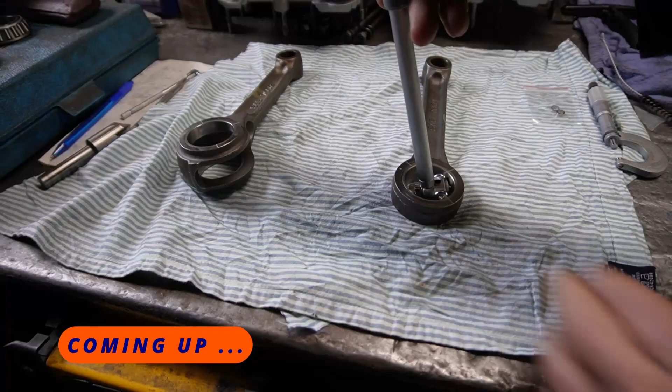Today we're going to move ahead with Gus's motor, and I got some parts in and I'm really stoked. I ordered myself a new set of small bore gauges, which are very hard to get for small holes. I have them for my cylinders and such and to measure, but to get down to something that's like 1 5/8 inches and stuff, it's hard to find something. But I did, thank God for the interweb, and I've got a little something to use.

I've been able to check these out. I had a little problem with my telescoping gauges, these little ones like this, and I was getting contradicting readings back and forth and back and forth. I wasn't sure what was happening, and it was getting very frustrating. So I took a little trip and went up to see my buddy Jimmy at Scotia Machine, and we talked about what was going on, and I said, Jimmy, here, measure these things for me and see where I'm at.

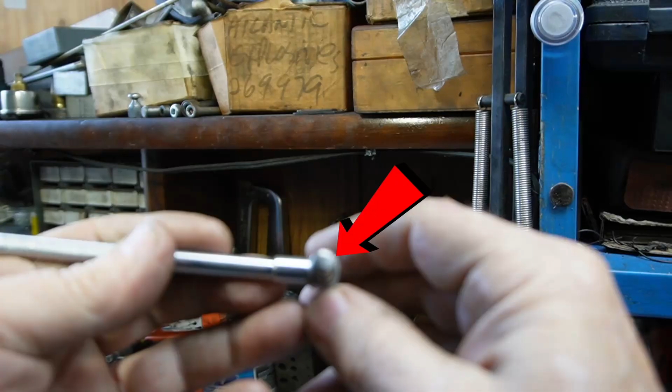Well, Jimmy, with his many years of experience, was able to teach this old guy a little something again. Turns out that these telescoping gauges, the old ones I had, the tips were worn just ever so slightly, so when you used them, you would get contradicting readings. So I hope you were able to see those little spots on it. It's hard to get through the magnifying glass, but it was a lesson learned. Sometimes the smallest of things can cause you big problems. So stop, take a moment, figure out what the problem is.

That little rounding off of the edge caused the measurements to fluctuate within 1/1000th of an inch. And we certainly don't need that. Those surfaces should be perfectly smooth and rounded. Who knew? Live and learn, and I'm always learning things, and I'm glad of that. So thanks, Jimmy. Saved me a lot of grief, and I'm glad I stopped before I went too far and made it a bigger problem.

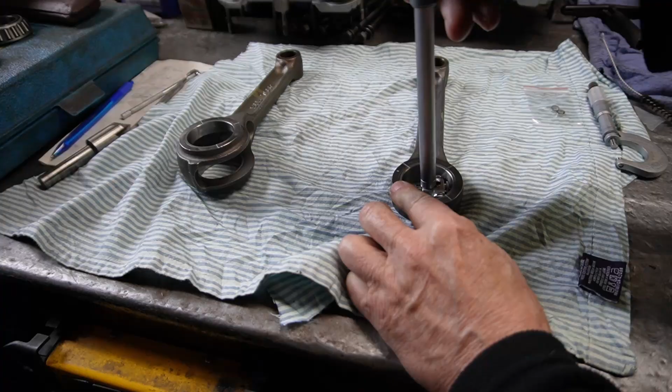So now I've ordered new gauges, and I've ordered a new dial bore gauge. This is it, and it has a very small little end here, so you're able to tell the little holes. I can use this for the bottom of the rods. I can use this for the pinion shaft holes, so I'm stoked about it. It's a new tool. Sometimes you got to break down and buy them, and after my many years of being here, I figured why not treat myself.

So let's get on to Gus's. I've got my exhaust valves. We're going to lap them in there today, get those heads ready. I'm going to take some measurements and make sure we get the clearance for the cam that we've got, and move along with some other things, probably getting at the bottom end today. All right, let's go.

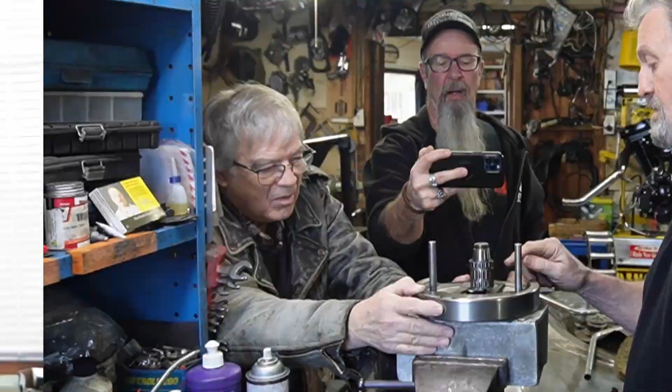So while we were working on the bottom end of Gus's, it had steel cages in them, which require a different bearing from the aluminum cages. Yeah, I'm correct. 3 sets of bearings and steel cages. And trying to search them out here in the Great White North wasn't as easy as I thought. Turns out I couldn't get standard ones. I couldn't get 2 ten-thousandths over. The only thing I could get that was available was 4 ten-thousandths of an inch. So consequently, what we had to do was resize the bottom of our rods so that they would fit properly.

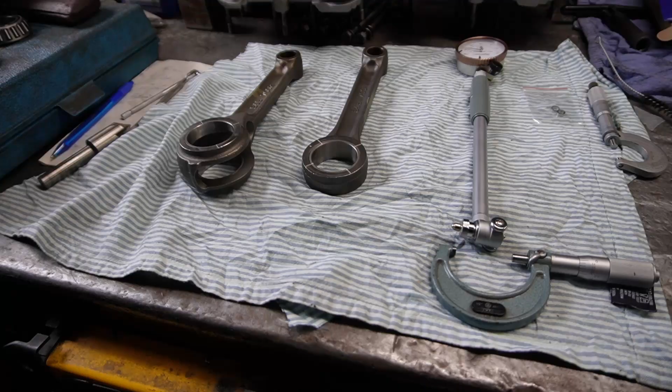With our new dial gauge, I'll show you the advantage of using it and how it's going to become a great tool. So when we get our dial bore gauge set up, it comes with different anvils, they call them, to put in here at different lengths. And you will take your micrometers. What we have here is locked on the size that we want, and what we want is 1.626 inches, that's where we need it to go. By taking your micrometers and setting them in the gauge here, we can dial this gauge in and set this on 0. So we know right now it's set on 0 and we're at 1.626 inches.

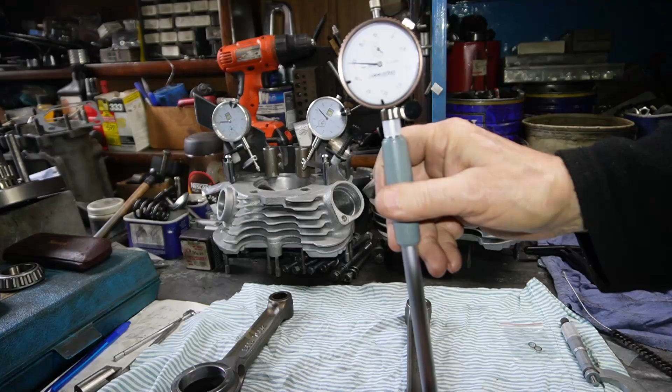Having set that and locked everything into place, now we're able to check our rods. And what we do is set it right down in the bottom of the rods and rock it back and forth and check our readings all around. So by sitting it into our rods here, we're just going to check it here, and we're right on the 0. I'm hoping you can see that showing up in there.

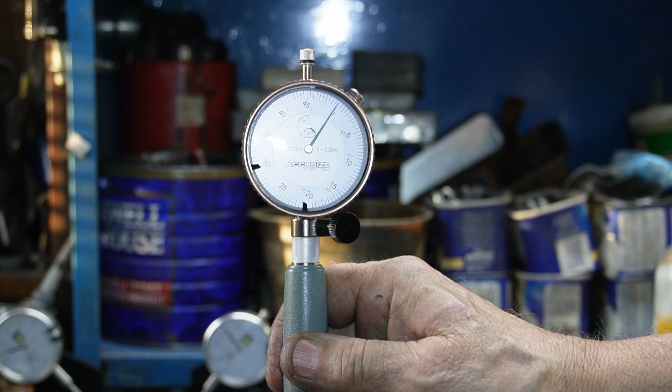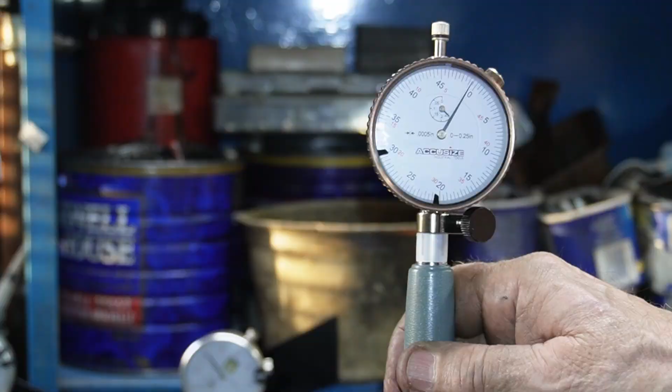And we'll also check it around in different top to bottom. And that's right where we want to be. And we'll do the same with our other rods. And you can see we're just touching the thousandths of an inch there. There we go.

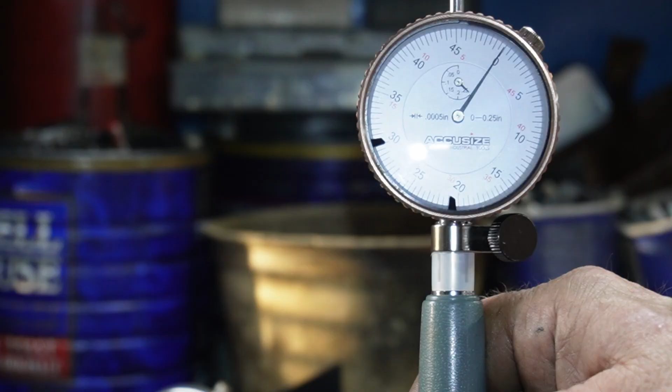So we'll go around and check them this way, and this way, and this way. All at different angles all around, and both sides of this rod, to make sure that we have them where we want them. Well, as you can see, it's a very valuable tool. Yes, we can do it with these telescoping gauges and measure, and now that I have new ones, I'm getting the correct measurement off them like I wanted. It's just a lesson learned as you go along.

If you're questioning something and you're thinking, well, that doesn't seem right, I just can't quite get it, take a moment and figure it out, because it could make the difference between right and wrong and what's happening, especially when we come to rod bottoms and things like that. We need to be accurate and be sure. If you're doing 4 or 5 measurements and they're all over the place, something's wrong.

Having been in this trade for many, many years, I knew something wasn't right, but I had never personally heard of the telescoping gauges ends wearing. Once I looked at them underneath a little magnifying glass, it was plain to see that the ends had been rounded off. And by holding them a certain way, I was getting the measurements I needed. By holding them another way, I was out almost half a thou to a thousandth of an inch.

So I got to thank Jimmy for updating me and showing me what can go wrong. And it was just another little trick of the trade that I never thought about. Now I do. Now I will check all my other ones. So, if you can buy tools, buy tools. Sometimes things that you think are expensive are not out of the ballpark when it comes to being able to make the right decision on what you're doing. And it's imperative that that's done.

Okay, so let's move on with it. We know the rods are good. I'm just going to get ready to lap in my exhaust valves, check some measurements on the heads, make sure they're good, and we'll be putting the bottom end together. Stick with us. So now that we've got our new exhaust valves, I'm just going to lap them in here and make sure that we've got a nice seat all around in there.

Oh, a little bit of compound. Just put a little dab around and slide the valve in.

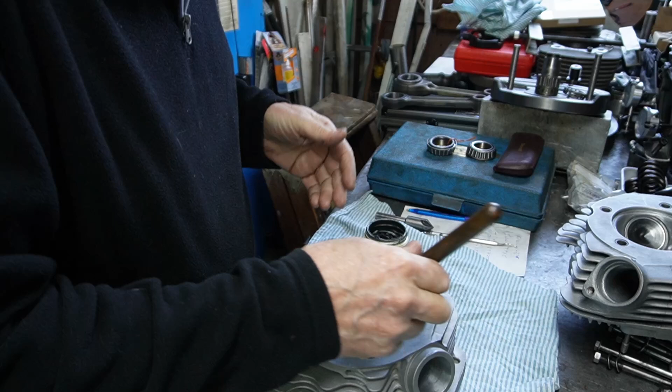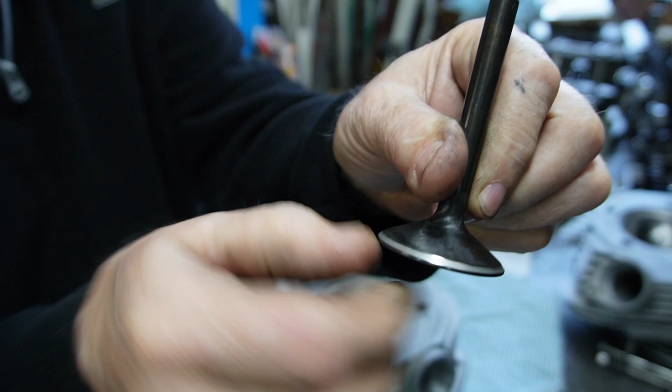And we'll have a quick peek. And that's giving me just a nice little seat around there. And it's hard to see, but we've got a nice seat in the middle of the valve. Got a little shiny spot on the edge and a little shiny spot up this edge. It's hard to see there, and I'm not sure if you can, but we've got a nice gray seat forming right around there. So we'll have a peek in here.

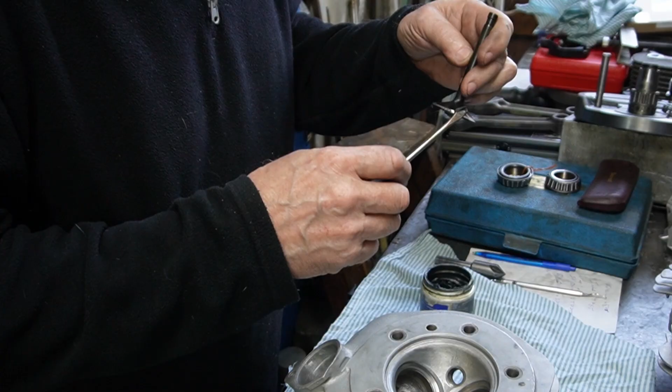I always find a little bit of contact cleaner or brake clean in there will make the satin part stand out so you can see it. And that looks really good there. Really good. So I'm just going to give it one more little go. And maybe I can make it a little better to be able to see. But I'm happy with that.

There, that felt a little better. I think that putting light on it will help a little bit, but you can see the gray satin finish around there. And we're going to wash these heads out extremely well again, just to make sure that there's no compound in them at all. And there, I think you can see the satin around the seat.

So we'll keep our valves with the head so that when we go to set them up, we have the right ones in the right ones.

And there you go. You can see some shiny stuff on the edge. Here's the seat, just above the edge, and that's what we want. And we can see our seat down in there as well. Okay, so like I say, we'll stick these in so we know which ones go where, and we keep them together.

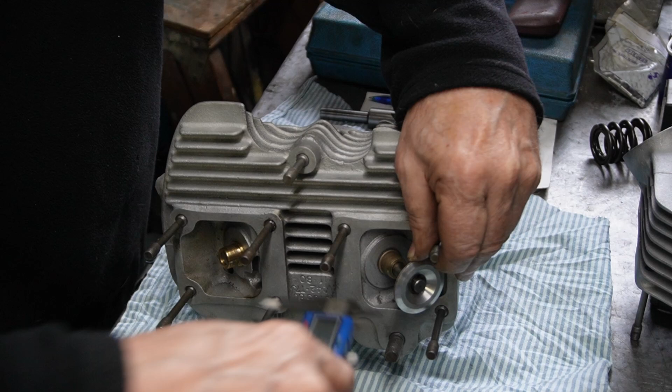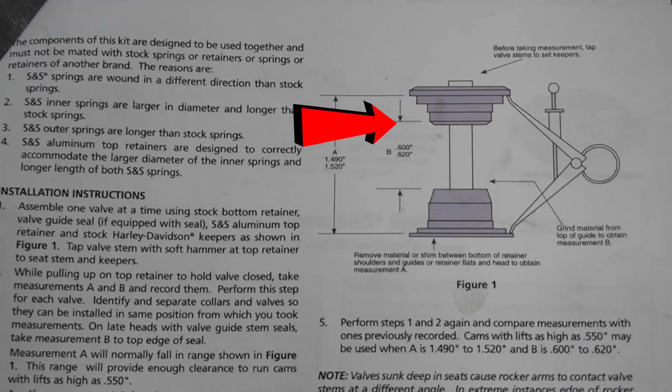So we've put our keys in our valve collar here, and we've held it up there as best we can, and we need a measurement from the bottom of the top collar to the top of the valve guide. And we've got about 717, 720, so 0.718 was the intake. So we'll do the same here on the exhaust. It's a little tricky sometimes to get the keys in there. Patience is a virtue.

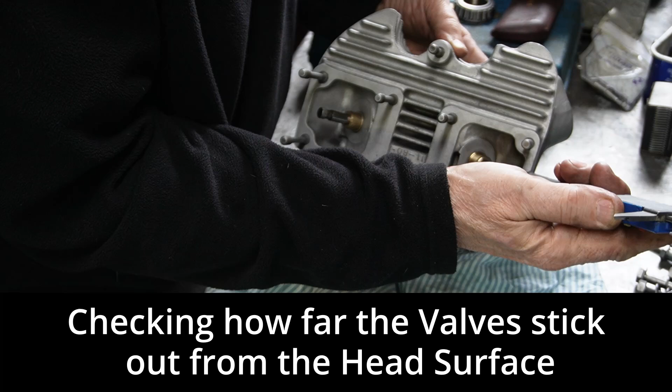Okay. And we check the valve stem protrusion on this one. So we got a problem with the guides, and the guides stick up taller than the stock guides. And it's creating a bit of a problem for me now when it comes to clearance. And we've got this little small cutter, and what we're able to do is cut some off the top of the guide carefully.

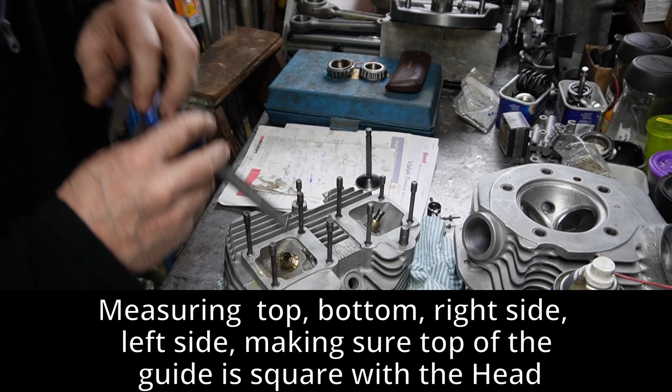I'm trying to work it down to get it down to the height the other one is. We're close there now. Very close. I think just a little tiny bit more, and we should have it. Just another 1/10 or so, and we should be there. Tiny bit more off of that side. Five. That's about where we want it.

Making sure that the underneath of the valve collars don't hit the exhaust guide is very important on these, especially on the 81 heads, 8081s. They're made a little bit different, and that's creating the problems. I probably should have spun the guides off at first, but I didn't, so it is what it is. So we'll just clean them up and dress them up, run my little hone through just to make sure there's no burrs in them, and we'll be good to go. There, that's looking better. Let's blow her out. That's going to give me what I need.

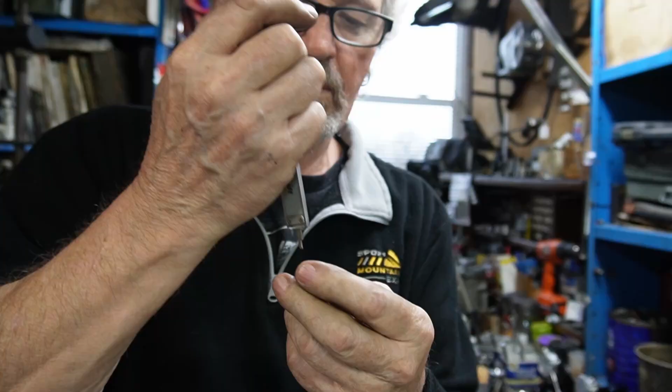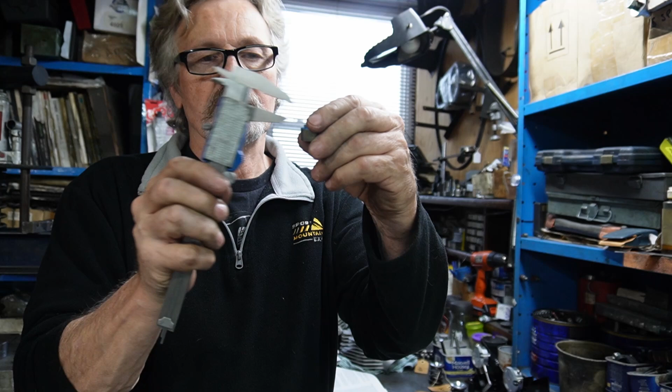It's just these that are quite tall, so I'm trying to see how much I can get away with in there. These valve guide seals, or any of them for that matter, take a measurement like this, down in the depth, and take a measurement like this on the total height, subtract the two, and that'll tell you how much this is going to stick up above the valve guide. Very important measurement to have. Those are about 145 thou tall.

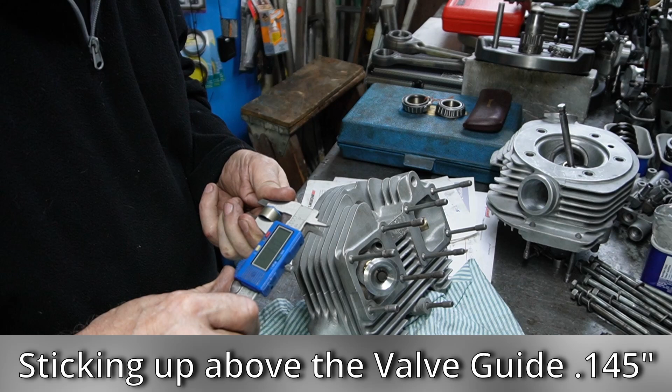So the intakes are fine, it's just the exhaust that I'm dealing with there. I'm going to see what else I got for seals, because these are quite tall. So I'm going to have a quick look and see what I got. Now I'm trying to figure out all the variables of valve height and whether your top spring is going to hit your guide or whether it's going to hit the seals. There's a lot of calculations that go into figuring them out.

We have to be very careful with these 8081 heads because they have a problem with the way they're installed into the head and they're made into the head. But that being said, we just have to take our time and do our calculations. Now, there's a few things that I have run into that are going to be a problem that I'm going to have to machine out.

Number one, when we look at our bottom collar for the valve guides, this goes down and the valve guide actually sticks through it. Now, what we have to do is put the seal on our valve guide, but we have to make sure that we've got the seal down as far as we can go on the valve guide. But as you can see here, I can't get it in this hole. I can get it in the back side, but I can't get it in the hole on the front side.

And that means that this seal won't go down and seat where it's supposed to on the valve guide, and that's creating a huge problem at this point because it sticks up so high. So what we're going to have to do is just trim the inside of this out ever so slightly, just so we can slide that seal through it and get it to go down and bottom out where it's supposed to be in there. Otherwise, it will stick way up.

When the valve comes down, the top collar will hit that and keep smashing it, and will ruin the seal for sure very quickly. So we have to go along at all four of them. We have to machine out so that that seal will go down inside. It's just about in there, but he still doesn't quite want to go through.

And we've got to compensate for when this goes on. This is going to swell up some here once this presses on there, so it can't be that tight. You just don't want to go down below the bottom size. That should about do it. And we haven't bothered the bottom ring in here, which fits against the guide. So that should leave us plenty of safety there.

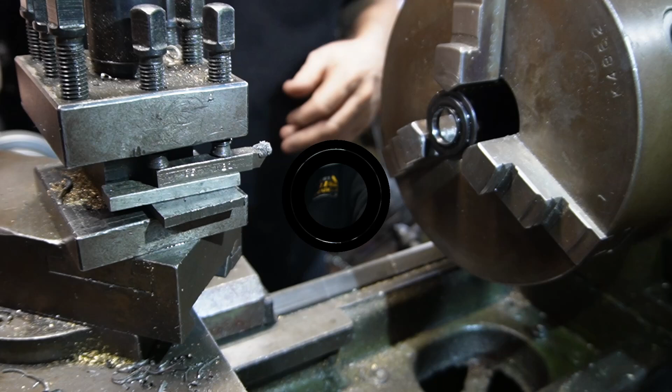So what we found here with our top collar, something had definitely been rubbing there a little bit. It's really hard to determine what, and we can't see any marks on anything, but whether it was misadjustment of the push rods or something, there was definitely something rubbing along the top there. So what I propose to do here is take about 10/1000ths of an inch off of them, just enough to clean it up, and hopefully that won't interfere with the rocker arm. We'll make a cut and see what happens.

10 thousandths of an inch is not going to make or break it, but we've cleaned off that spot, and I'm hoping that that will stop any further ones. I'm going to go along and do the same to the rest, just to give me that little extra bit of clearance on the top there.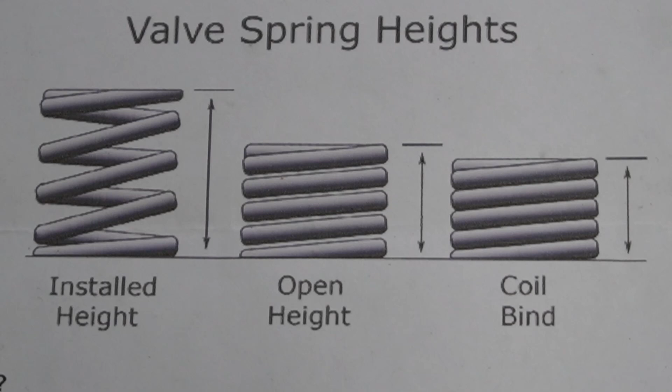We've got to figure out where our coil bind is. That gives us a number to start with, and then we can figure out our installed spring height. So we just put our springs in the vise, and there is a little cutout here, and we kind of work around these little cutouts to put them in place. Put it down far enough so that it won't explode. These are zeroed.

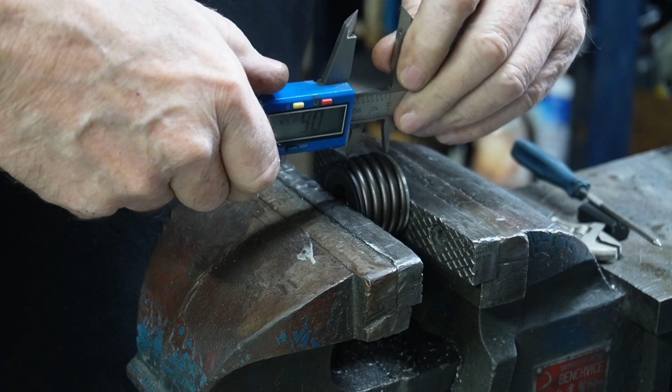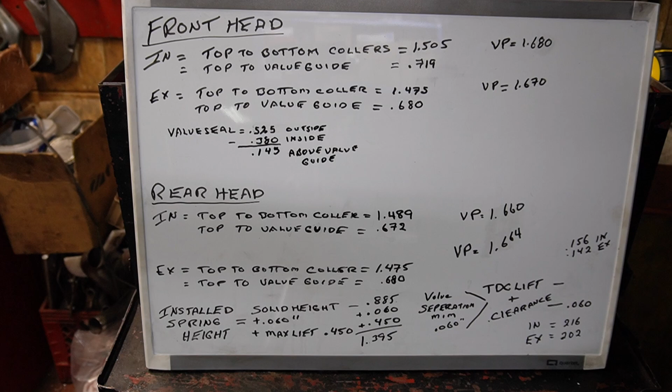.885. So those ones there are .885, and we'll go along and measure some of the other ones, and each one will put in the right place for the right head. So as you can see here, we've done some of our calculations to see where we're at, and it takes a little while to figure this all out, but it's well worth it in the end.

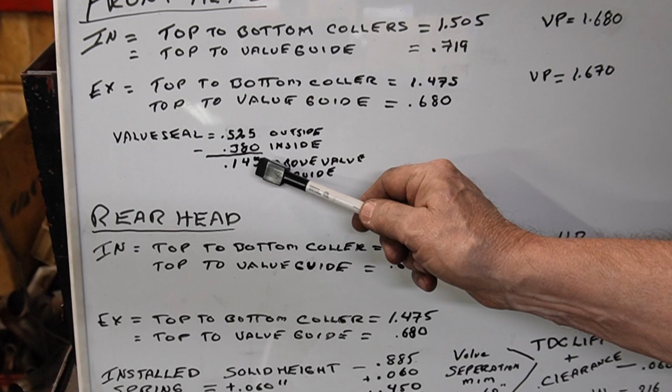This here is our valve seal, and the outside height of the valve seal is 525. The inside is 380 down inside, which leaves us 145 thousandths of an inch, which will actually stick up above the valve guide. So we have to compensate for that when we're figuring out how far the valve will move up and down.

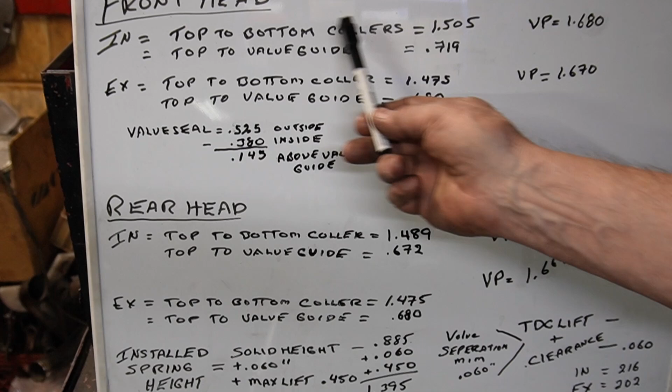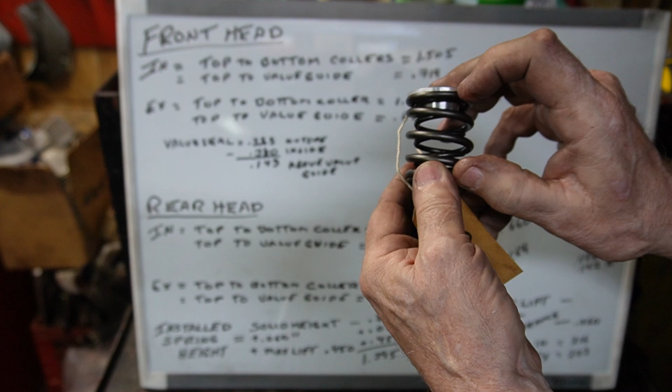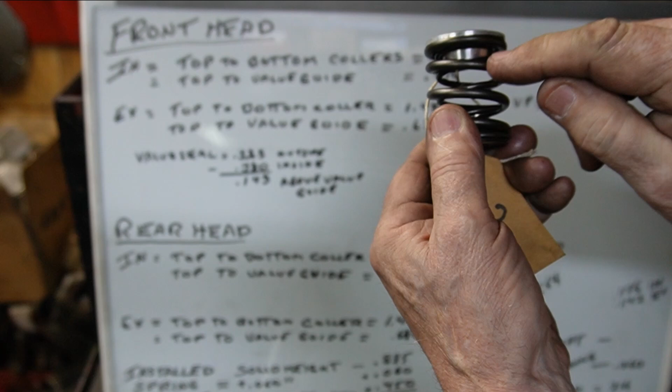So our front head, from the top where the spring sits, what we're talking about is where the spring sits on this here, and where it sits on the bottom of the steel collar. This measurement in between here, when it's mounted and in the head, is 1.505 inches. From the underneath of this, where your keepers stay inside, so from the bottom of that to the top of the valve guide itself is 0.719.

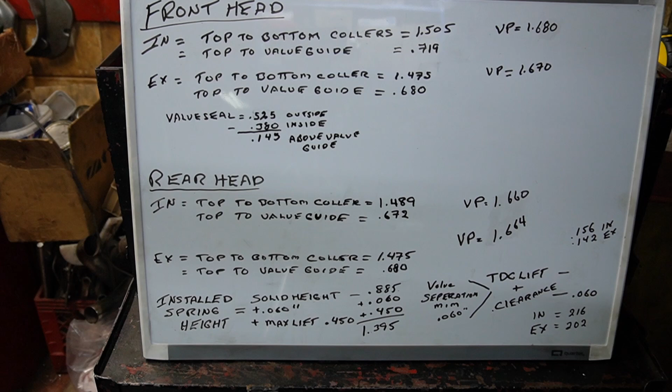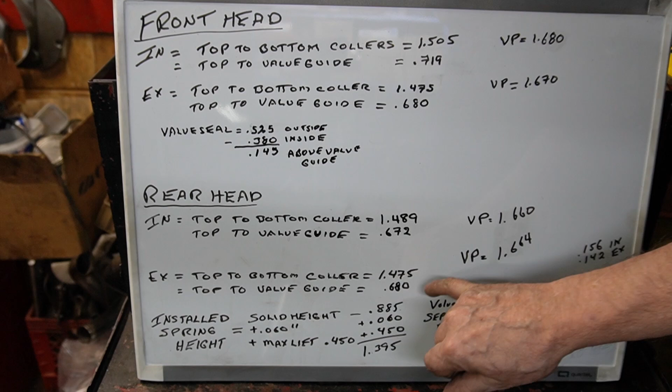Now this one is quite tall and taller than the rest, and we can use shims and shim it up some, but we'll see to it when we get to it what we're at. Now the exhaust, where we've put new valves in, our exhausts are 475 and 475. They're pretty consistent here with the front and the rear head, but the intakes, there's quite a discrepancy here. Now in doing our calculations, this seems to be our worst here from the top of the valve.

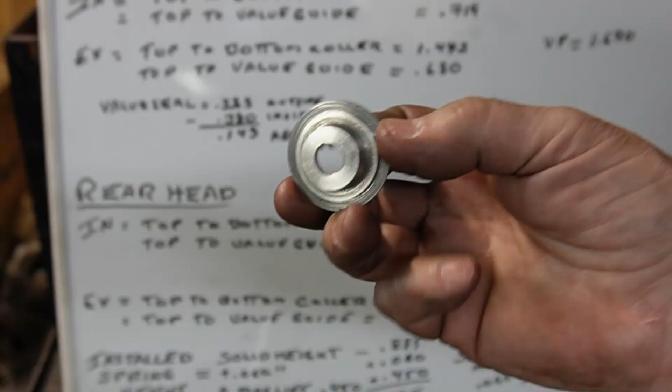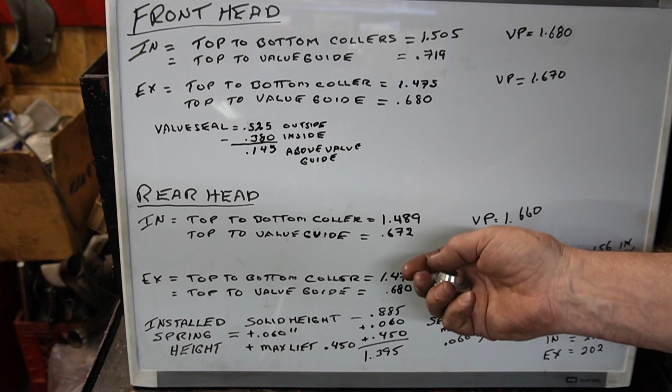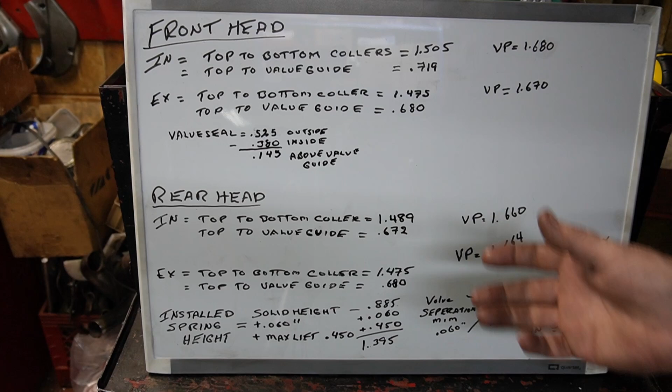Now what we can do is we can cut the valve guide itself down, or we can take a small cut off the bottom of this. No more than 50 thousandths of an inch is what they say, but I could take off, let's say 20 thousandths of an inch, and bring this number up to like 1.70, close to it, 72, 82, 92. So it would bring it up a little bit closer to this. But we're going to do our calculations and see if we really have to do much of anything. I'm probably going to do a little bit, but we'll get to it when we do the rest of the calculations.

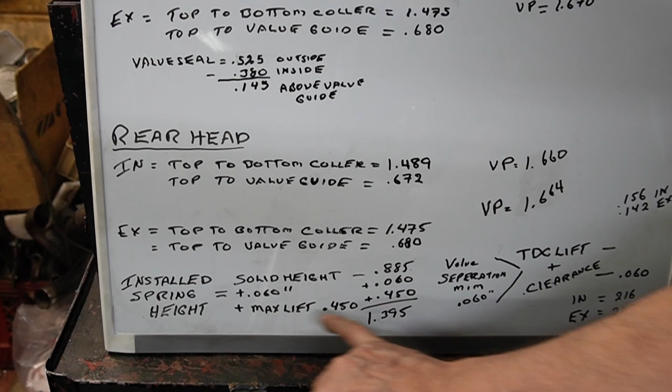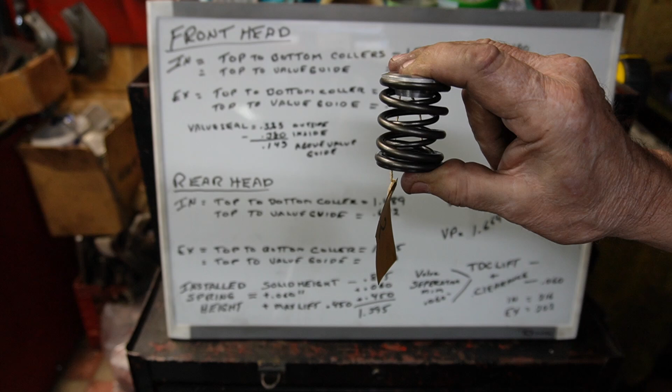Our installed spring height here is our solid height with this 0.885 plus 60 thou extra clearance, plus our max lift at 450 for the cam we're using, which is 1.395. But in actual fact, this stack, when it's on, will actually stand up probably 100 thousandths of an inch taller than that, because of the way that these are set down inside to allow for more clearance to let the spring come up to let you use higher lift cams without a lot of head modifications.

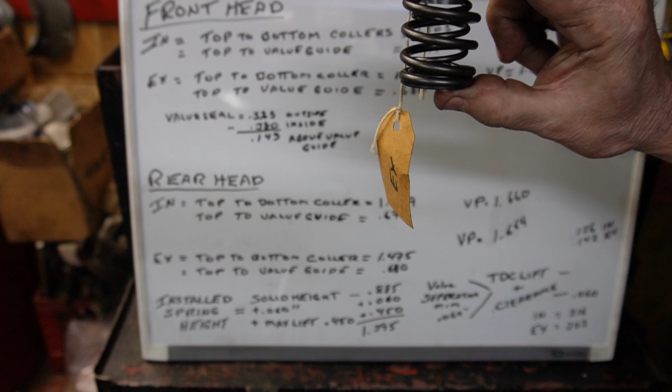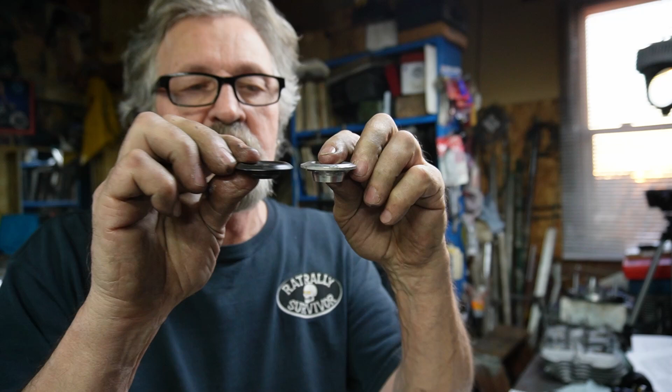And with these type of collars, they allow the spring to go up a lot farther because this is sunk down where it's hooked onto your valve. So now we have a lot of extra clearance, and I've measured them, and it's almost 100 thou clearance different between a stock setup and the aluminum setup. You can see the difference in the heights here. If we were to hold that even with the other one, you could see how the bottom sticks down a lot farther. So this collar would have to be down like here.

So this is how much more the S&S is sticking up and going to give us that much more free length. The reason for that is to use higher lift cams. And if you were to put, say, a 550 lift cam in it, you could do it with this as long as you're checking out your other clearances. We're running a 450 in this, so we're going to be just fine.

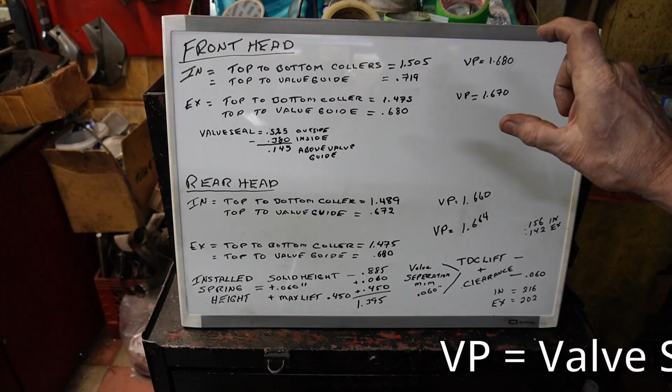The VPs here, it's just how far the valve is sticking out of the guide in the head. From the top of the valve to where the bottom of this valve spring sits on the head. These are these distances of how much they stick up. So we don't want to really do anything with these and make it stick up any higher. But as you can see again with this one, we're like 660 here. So we could go a 10 thou on that.

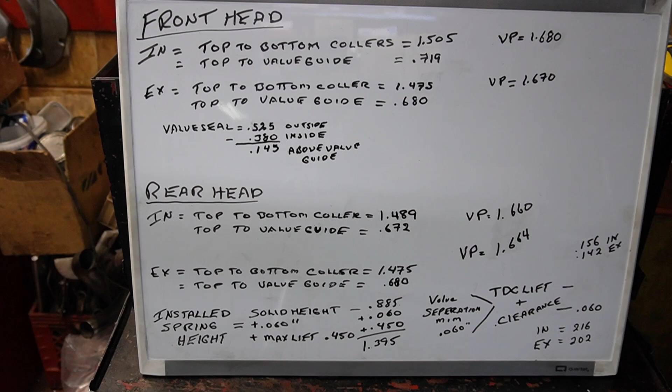To bring this number into a little more range, or we could cut the top off the collar, as we said. There's a couple ways we can go, and we have to decide which way to go. Another thing we want to try and do is figure out our spring pressure. And we want to know, when this is installed, and this is crushed down to installation height, how much spring pressure do we have there?

We don't want too much spring pressure in there, because that just makes it harder on the valve seats and everything else in your valvetrain. So we certainly don't want to be excessive. So we're going to go ahead and check these springs, and I'll walk you through one, and we're going to do the rest of them. But I'll give you an idea of what we're looking at here.

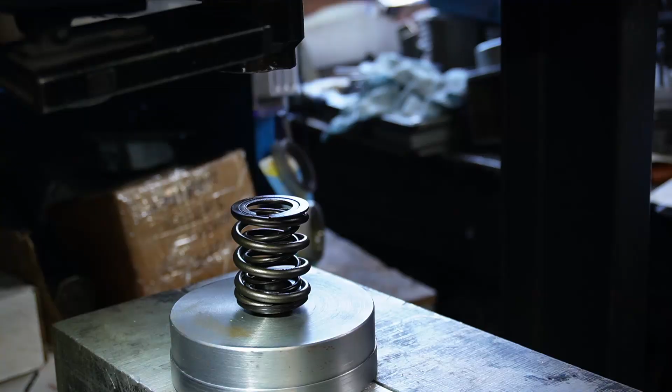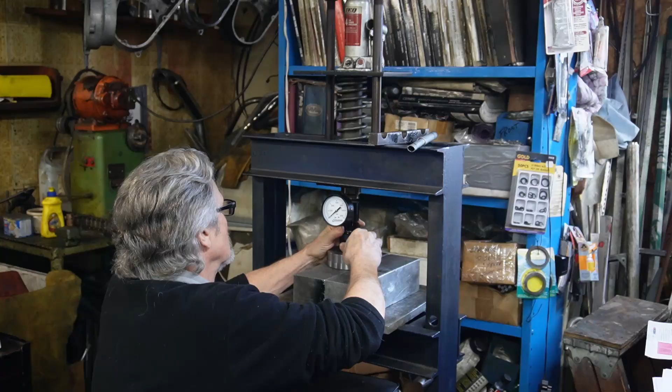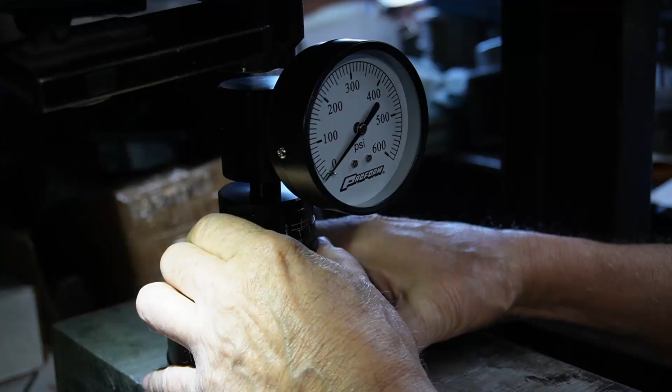Okay, we're going to put our spring on our holder, but we're going to add this into the bottom because our gauge is set up for 1.5 inches. Start out trying to get centered on our spring. That's why we've made the pedestal in the middle. Makes it a little easier for us. Back a little further.

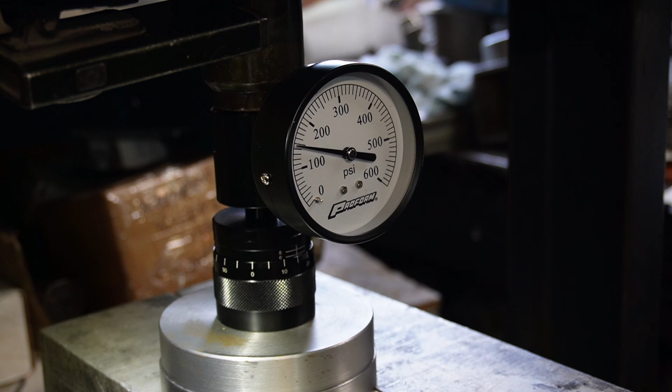And we're about 140 pounds there. I'm going to turn this down. 6, about 10:35. Oh, just about 10:15 there, and my gauge is at about 25 thou. So 15 and 25 is 40. So about 640 there, give or take a little bit. Tiny bit there.

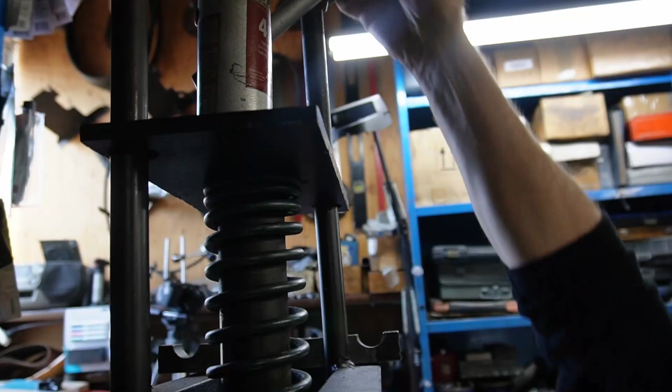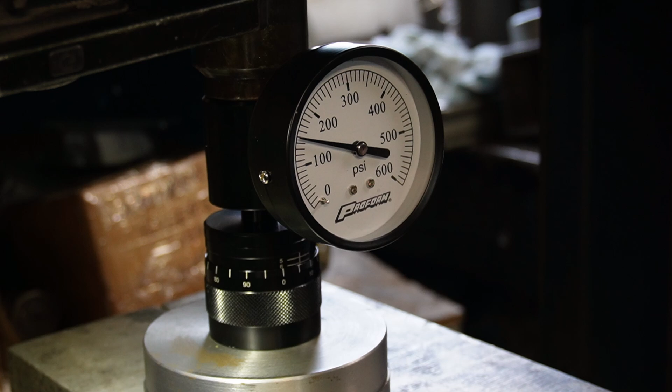So we'll turn it down here to 100, brings us 1.6 right there. So we're about 150 pounds right there. That's what we're looking for. So that gives us right at 1.630. And when we've done our calculations, we've taken our bottom piece that we used just to space it up. So our calculations told us that 1.395 was the installed height.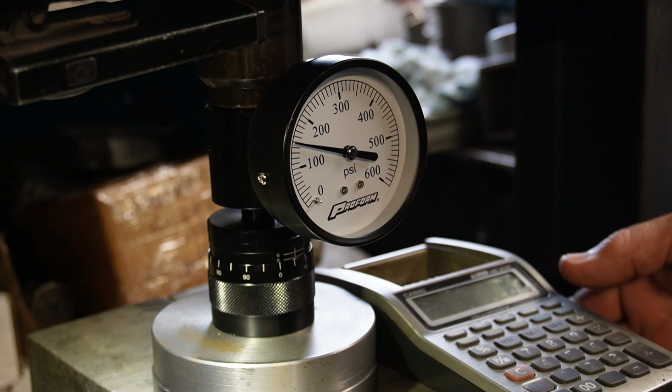So we added 0.235 on the bottom here, the pedestal. So we'll add that to it, and I get 1.63, which is right where I am, 1.630. And we're about 150 pounds, which is about what I expected with these S&S springs. Our S&S springs allow us a little more travel on that. So our height is not really that 1.395. You got to add about another 100 thousandths of an inch to that.

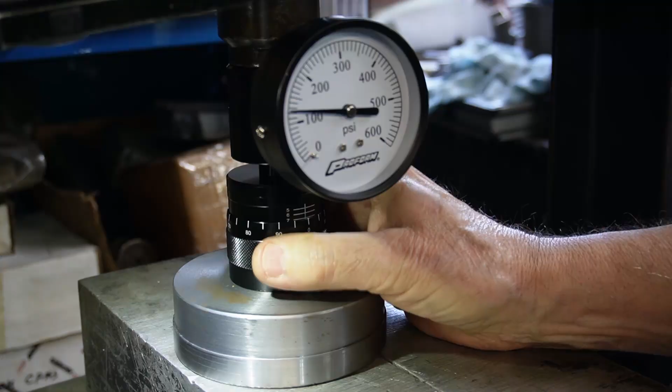So, if I add 0.1 and just a little bit more, ever so close, 1.73, and I'm looking at it at about 125 pounds, which would be about right, I would expect, at 125 pounds because you've got the extra tallness of the springs and the spring collars there.

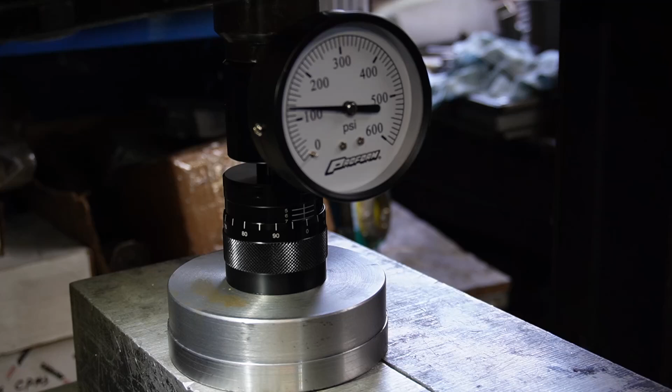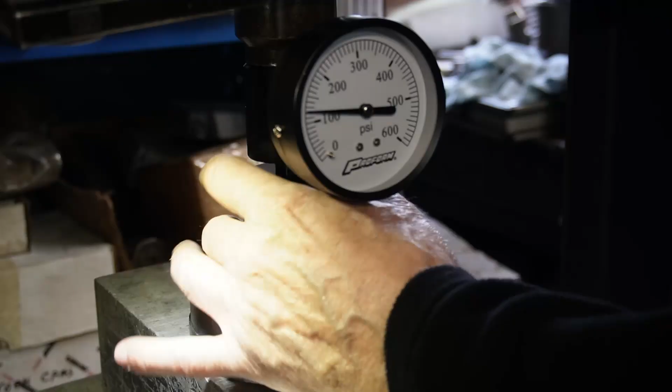It all kind of builds into it, and you're just sort of taking a guess and seeing where you are and looking at the pressures, and I do it for amusement more than anything, but in some cases you need to know. So there, we got it done. It's not an exact science, but this little pressure gauge has come in handy for me to check springs with and give me an idea of where I'm going. Without it, you would have no idea of your spring pressures and such in there.

And I like to know that I'm in the ballpark and where they should be, as near as you can figure out. Sometimes some information is hard to find, and other times it's not. But we know that we're well within the ballpark there with these S&S springs. So we have to take all them things into consideration. So what you've seen there, we got a good idea of where we're going.